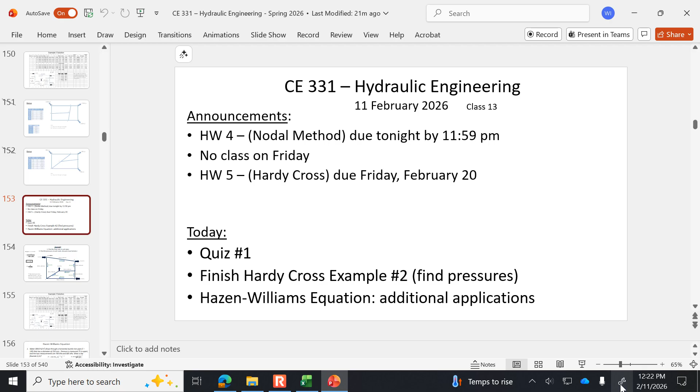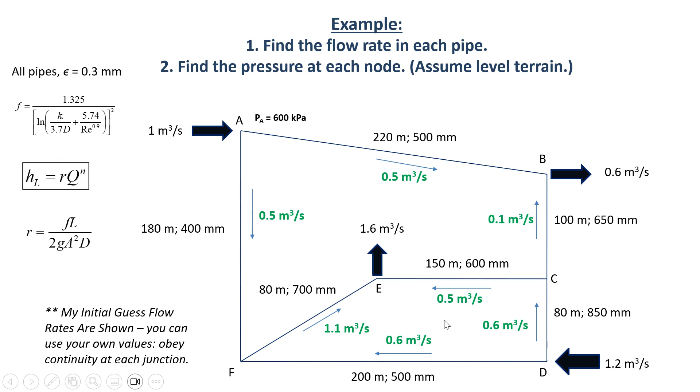So just to refresh your memory on what we did last time, we had this network, a pipe network, where we know the water's coming in at certain junctions. We know it's going out at certain junctions, and our method was to do an initial flow balance so that continuity is satisfied at each junction, meaning in equals out at each one of these labeled nodes. And then our process was to try and balance the energy so that there's the same amount of head loss through each path between 2 points. And so this shows the initial flow balance that I did. Some of you maybe had your own flow rates.

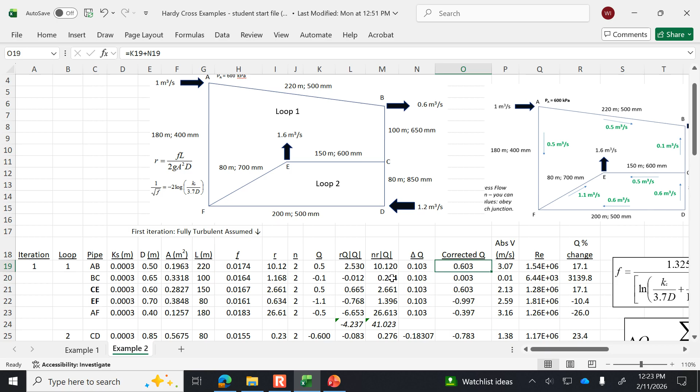And then we went through the process of having initial guess f values based on the fully turbulent flow assumption, and that allows us to use a simplified version of Swamee-Jain that doesn't include the Reynolds number. And we calculated this correction delta Q, and we adjusted the initial guess flow rates according to the delta Q, came up with improved versions of it. And then we had these pipes that are in both of the loops. They're the ones that are in bold, and what was special there is not only do we have an updated guess of the flow rate that's better than our initial flow guess, but also we had to remember to put the minus sign in when we were referencing that flow rate, because the perspective is different in loop 1 versus loop 2 in terms of clockwise versus counterclockwise.

So the first iteration took a kind of a while because we had to type in every formula. Second iteration took a lot less time because really the main adjustment we were making was we now had a new version of the f value. We're using the full Swamee-Jain equation rather than the fully turbulent flow version of the equation. So we updated the f values, and then for the flow rates, we didn't start over with our initial guess in the second iteration, but what we did was we referenced the updated flow rate, and we tried to find the most recently calculated guess of the flow rate. And so for the pipes that aren't bold, it's just the output of the previous iteration. And the pipes that are bold, we looked at the opposite loop. And so then that's why we had the negative value there.

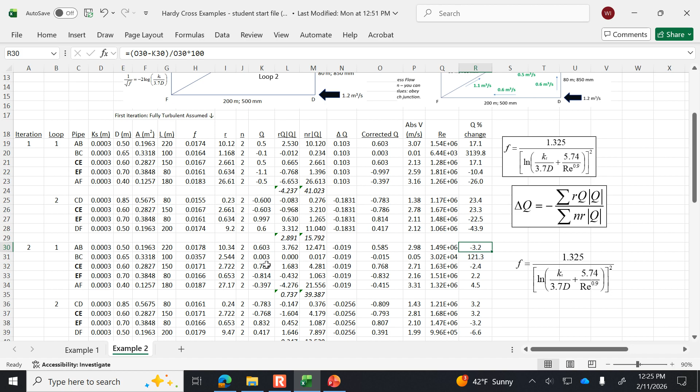So iteration 2 maybe took a little bit more time, but it looked like things were headed in the right direction because our correction factor, delta Q, was smaller in the second iteration, and therefore the percent change was decreasing. So the third iteration was really easy. In the third iteration, we just copied the entire block of calculations and constants, and we pasted it again. And because it was relying on relative references, it applied all the same calculations, but then the input guess values in iteration 3 was the output of iteration 2. So that's why it's doing something different in iteration 3, is because it's looking at the end value for iteration 2, and it's just running through the correction factors again.

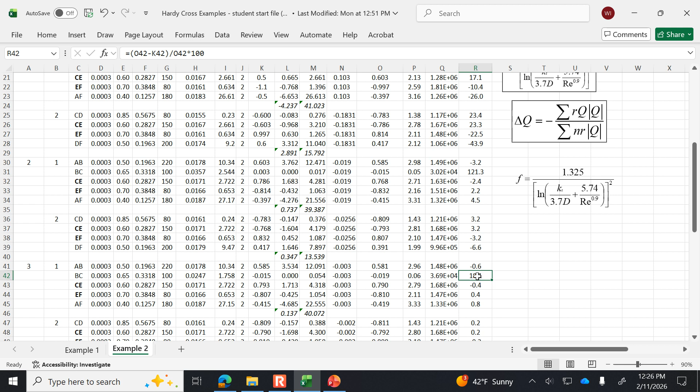And so our delta Q was smaller in the third iteration, but on a percentage basis, we still had this one pipe that hadn't quite converged, and so we did a fourth iteration. And it was in the fourth iteration that we got close enough.

By the way, on your homework that's due tonight, on that second problem, I think it'll probably take you 4 iterations for your solution to converge. And if it's like 1.5% below, not below 1% change, just leave it at 4 iterations. I don't want to torture you too much. 4 iterations is enough. So that's what we did here. We did 4 iterations, and the end flow rates are illustrated here at the bottom.

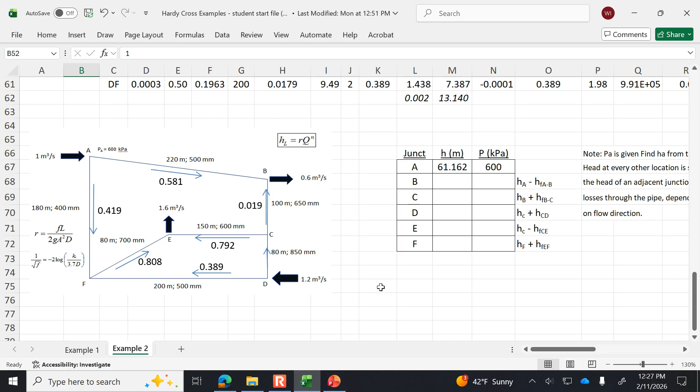Let's just do a spot check to make sure inflow equals outflow at a couple of the junctions. Because if it doesn't, then we've made a mistake somewhere. It's not just looking for a decreasing correction factor. That's not the only indication of convergence. We still have to satisfy continuity at each of the junctions.

So let's look at junction A. In 1 cubic meter per second, out 0.419, 0.581. Yeah, if I add those two together, it equals 1. Okay, so we're good at junction A. Let's look at junction E. Out 1.6, in 0.808, 0.792. Yes, junction E looks good. In fact, all of the junctions have the correct flow balance.

It looks like I didn't label CD with the flow rate. So CD, the flow rate there, 0.811. So yeah, it all works. So this is the final answer. The flow rates that are shown in this corrected Q column for iteration 4, these are the flow rates that I put onto the sketch.

Now, where we left off was trying to find the pressure at each junction. So from the sketch, I've drawn the direction of flow. And we know that head is decreasing in the direction of flow. And that's why the flow is going from one location to another, because there's more energy at A compared to B. So that's what's driving the flow from A towards B. So here, the head at A is defined by the known pressure at A. And remember that head is the pressure divided by the unit weight of the liquid. And so if the pressure at A is 600 kilopascals, then I'll divide that by 9.81 kilonewtons per cubic meter, and that's how I found out that the head at A is 61.162 meters.

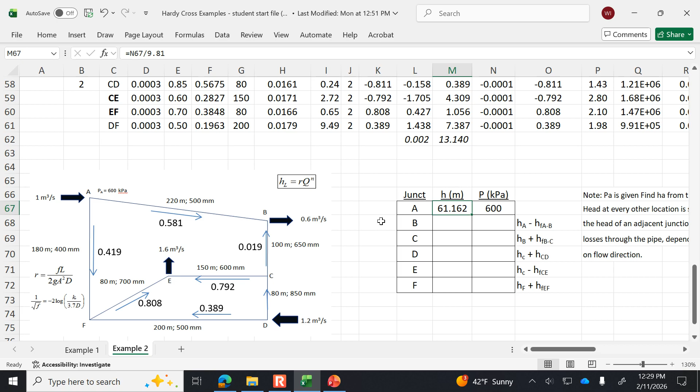So there will have to be less head at B. Why does there have to be less head at B? Because the water's going from A to B. So it wouldn't do that if the head at B was more. So how much less is it? Well, it's however much head there was at A minus the losses through that pipe. So over here, we can calculate the head loss through each pipe. And we're going to do that using the Darcy-Weisbach equation. So we're going to calculate the head loss through each pipe using h_f = f L V squared divided by D 2g.

Or, since we don't have, do we have the velocities? No, we've got the flow, well yeah, we've got the velocities here. So we could do it in terms of flow rate or velocity. If I was going to do it in terms of flow rate, I'd say f L Q squared divided by D 2g A squared. But since I already have the velocities, I'll use that instead. Okay, so let's go over here to the pipe head loss. So equals f, so here's the f value, times the length of the pipe. Here's the length, 220.

f L V squared. So now I need the velocity, V squared divided by the diameter. Here's the diameter, 0.5. D times 2 times g. And I'm in SI units, so it's 9.81. So the head loss through pipe AB is 3.49 meters. And all I have to do is drag that cell down through the rest of the rows, and it's going to calculate the head loss through each of the pipes.

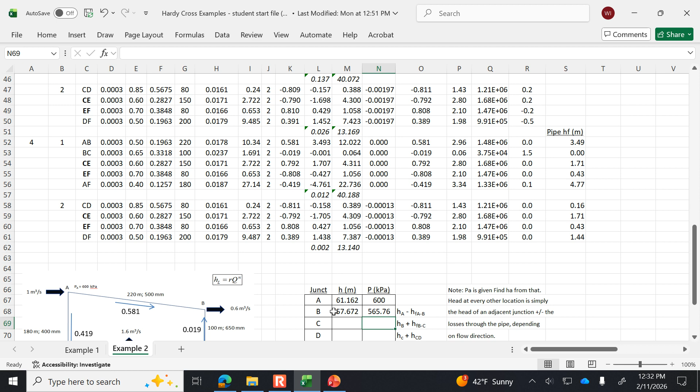So the amount of head at B is the head at A minus the loss through pipe AB. So if there was 61.162 meters of head at junction A, subtract 3.49 from that, and that means that there's 57.672 meters of head at junction B. And so therefore, how much pressure is there? Well, remember our relationship between pressure and head. The pressure is the head times the unit weight of water. So the pressure at B is the head there multiplied by 9.81 kilonewtons per cubic meter. So it's 565.76 kilopascals at junction B.

All right, now what about junction C? Okay, to get to junction C, I'm going against the flow. So that means that the head is higher at C than it is at B. So the head at C is the head at B plus the losses through pipe BC.

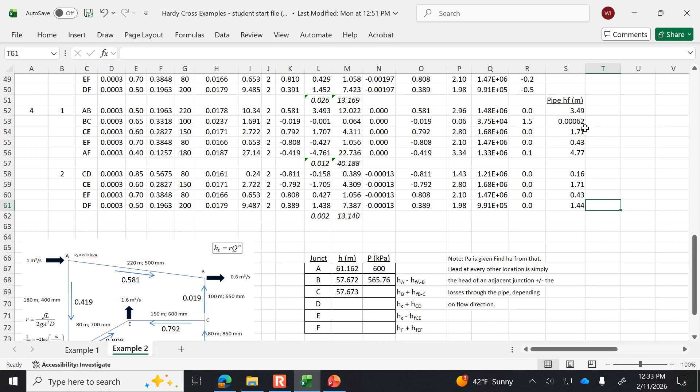So let me find, here is the losses through BC. It's pretty low, 0.00. That's just because it's only showing like to the nearest hundredth. If I had it show more, there is some head loss there. It's just really, really small because the flow rate's so low. There's hardly any water going through that pipe. So the pressure at C is going to be pretty close to the pressure at B because there's not much flow.

Now let's look at junction D, against the direction of flow going from C to D. So the head at D is the amount of head at C plus the losses through CD. So here's that. And then I can just drag the formula down for the pressure.

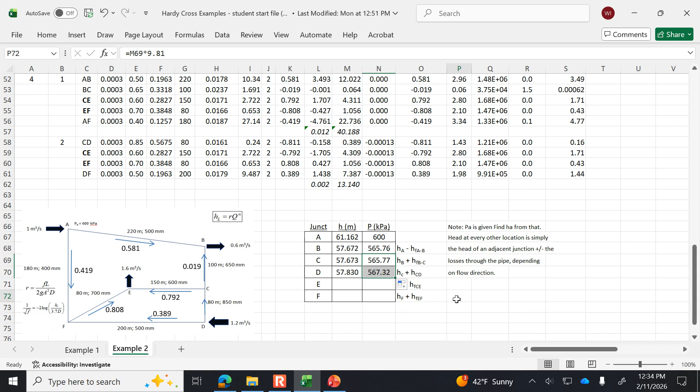Now we're looking to find junction E. How much head is there at E? So we go from C, and we're losing head in the direction of flow. So the head at E is however much head there was at C minus the loss through CE, which here I've got. It's 1.71 meters. We drag this down and find the pressure equivalent of that head.

And then the last one. At junction F, we have a couple of options. Actually, we had options with each of the junctions, but this is a good place to illustrate it. I can calculate the head at junction F by either saying it's however much head there is at A minus the losses through AF, or I could say it's how much head there is at E plus the losses through EF. Let me try both just to prove a point.

So I'm going to start with the head at A. So the head at F is the head at A minus the losses through AF. So here's that, the losses through AF. So it's 56.393. I'm going to write this on the board so I don't forget. 56.393 meters. That is if I go from A towards F.

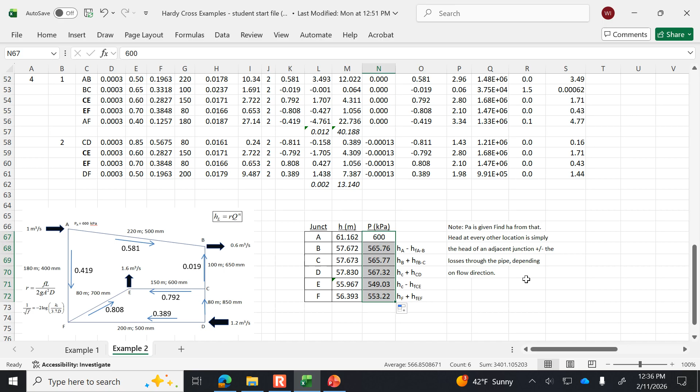All right, so we do have a little bit of time left. Let me hand out these Hazen Williams problems. And the reason why is you're very likely to see Hazen Williams problems on the FE exam. They're good 3-4 minute type problems. I write questions for the FE exam, and what they tell us to do is that the average time students can take on a problem is less than 4 minutes. So when you're writing questions for the FE exam, you're trying to find ways to assess knowledge in a quick way. And these Hazen Williams problems are good for that. So a couple of practice problems here.

Did you guys need one more? No, there was an extra. Oh, it's an extra. We need 2 more. 2 more here? We only need 2 more.

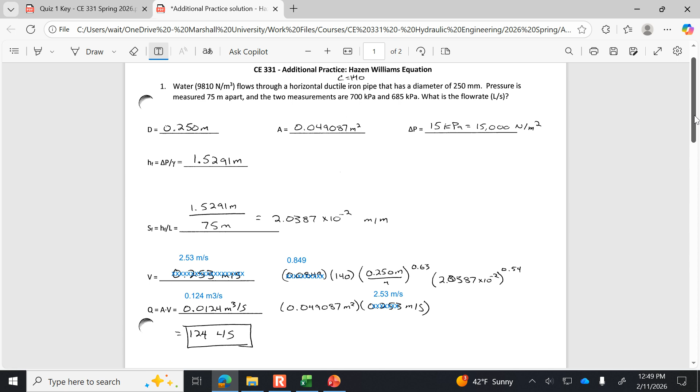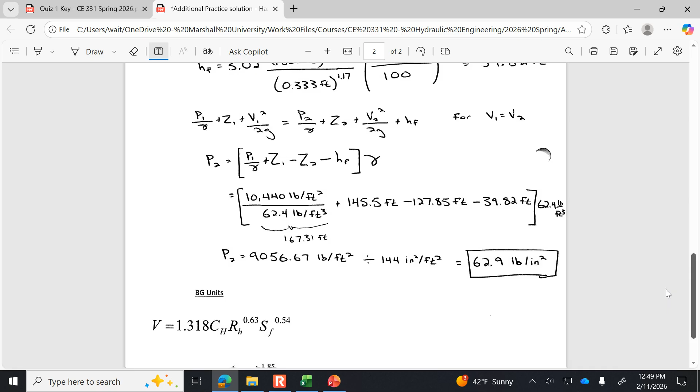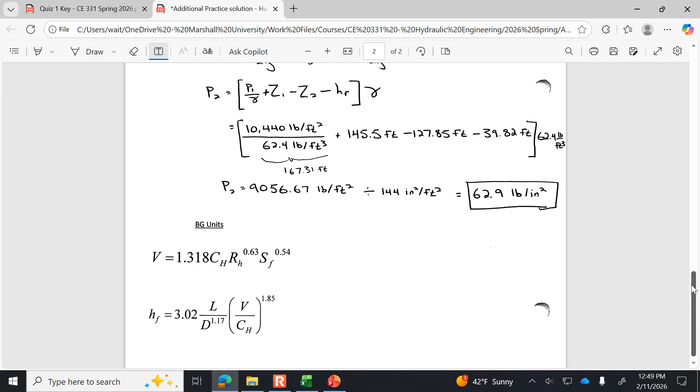Let's see if my second solution had better luck. Anybody finished the second problem yet? So this one's tricky because it's in traditional units, and those are always awkward. We have to convert the pressure from PSI into pounds per square foot for things to make sense, and the diameter into feet. The Hazen Williams equation is generally provided in terms of using the slope of the energy grade line to find the velocity, or if the velocity is known, using that to find the head loss due to pipe friction. And so here what we're doing is finding the head loss due to pipe friction.

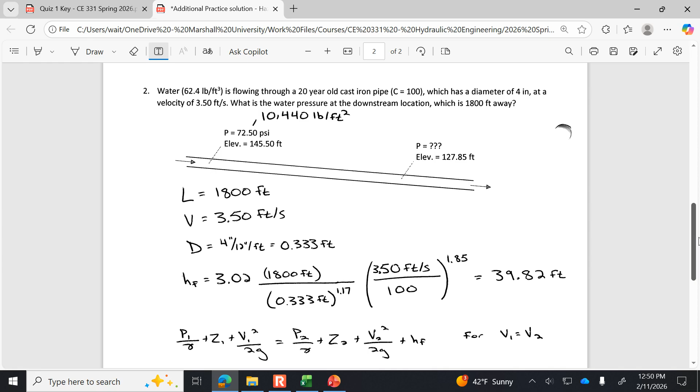So if you substitute in the length, the flow velocity, and so on, there's going to be 39.82 feet of head loss, and then you put that into the energy equation, rearranging the energy equation in terms of P2, and it's going to be 62.9 pounds per square inch.